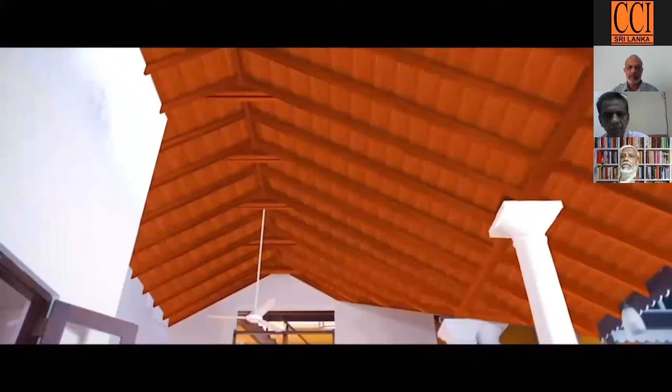Ceiling. Color up. Strip ceiling. Show your true colors to the whole world.

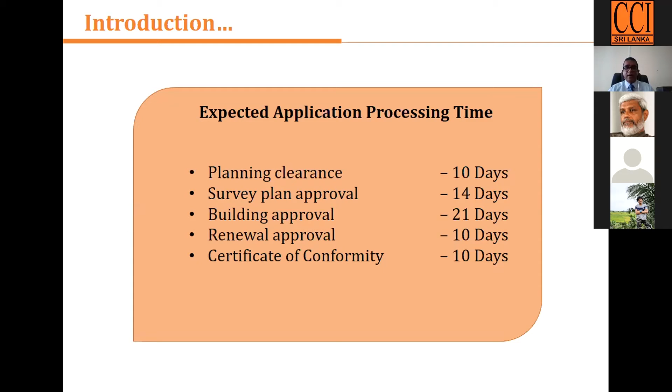These 4 topics I explained as introduction. And another thing I want to say, as a pilot project within this year, starting from September to December, we try to run this one-stop unit only within the Colombo Metro region area. It has 8 local authorities, including Colombo Metro area and capital area. Within next year, we hope to expand this program into all UDA offices in Sri Lanka, we have 22 sub-offices, we will expand to all UDA. At last, in phase 3, we hope to establish this system all over the country.

There are 268 local authorities we have already declared. We will install all these in local authorities within 2023.

The powers and functions of this process: to receive the application, process it, evaluate it, obtain process fees and issue approvals is the main objective. Another one is to apply for approvals from line agencies on behalf of the applicant or developer.

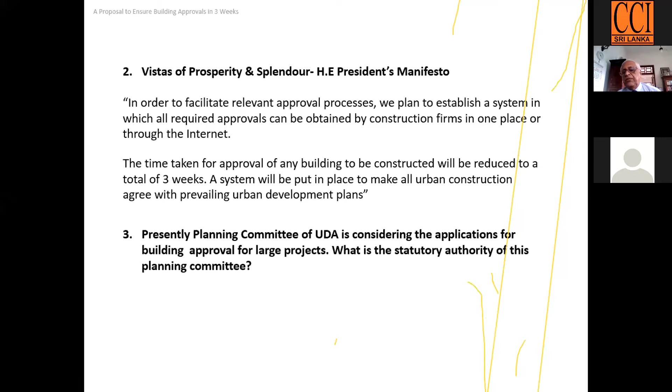So now, up to now, these building approvals, at least for the major buildings, have been considered and granted by the planning committee of UDA. It considers applications for building approval for larger projects. Now let us look at what is the statutory authority of the planning committee.

Now, if we have a look at the UDA provision under which this committee is established, I quote Section 8A of the UDA Amendment Act number 4 of 1982, on planning procedure: 'With a view to promoting and regulating the integrated planning and physical development of lands and buildings in a development area or part thereof, the authority shall, having regard to the amenities and services to be provided to the community, prepare a development plan for such development area or part thereof. Without prejudice to the generality of the powers conferred by subsection 1, a development plan may contain provisions in respect of all or any of the matters provided in the schedule to this law.'

Then Section 8B refers particularly to the appointment of the planning committee: 'For the purpose of advising the authority on all matters pertaining to the preparation, implementation, and enforcement of a development plan, there shall be appointed, in terms of section 5, a committee, hereinafter referred to as the planning committee.' Now, this is the planning committee that is functioning. Now, what is the statutory authority of this planning committee?

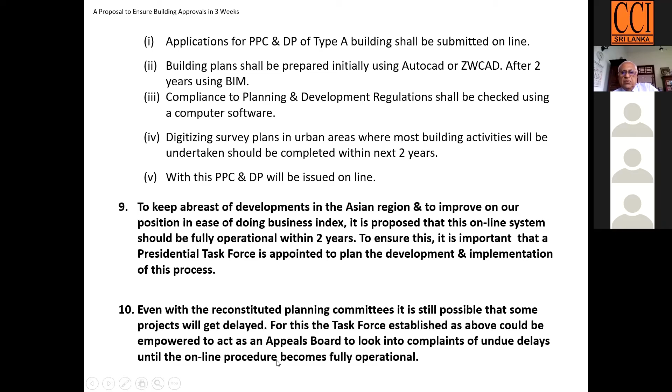For this, the task force established as above could be empowered to act as an appeals board, looking into complaints of undue delays until the online procedure becomes fully operational.

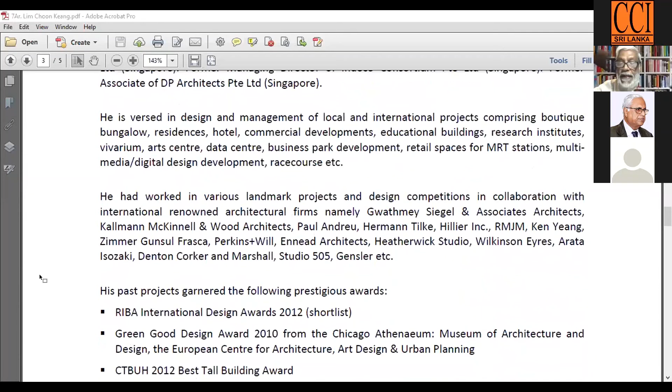He believes that architecture can change the world and make the world more happy. He is currently a council member of the Singapore Institute of Architects, SIA, and chairman advisor of the following SIA trusts: Practice Trust, Compliance and Standards Trust, Architecture Business, Small and Medium Architecture Practice, and Digital Architecture. He is currently the managing principal and creative director of CKLNet Architects.

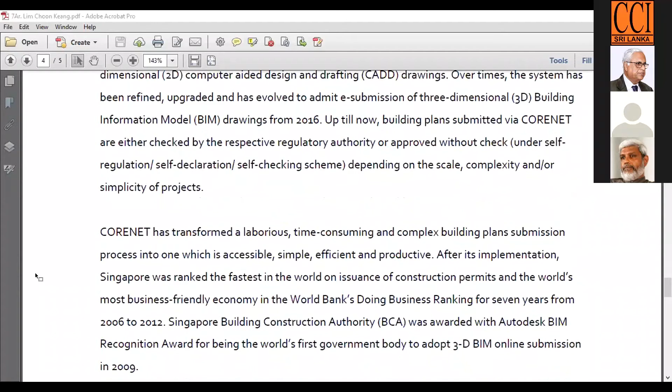Architect Lim has won many local and international awards, to name a few: Green Good Design Award 2010 from the Chicago Athenaeum, Museum of Architecture and Design, the European Centre for Architecture, CTBUH 2012 Best Tall Building Award, Gold Award 2011 by World Association of Chinese Architects. He is also a part-time faculty of the Singapore University of Technology and Design.

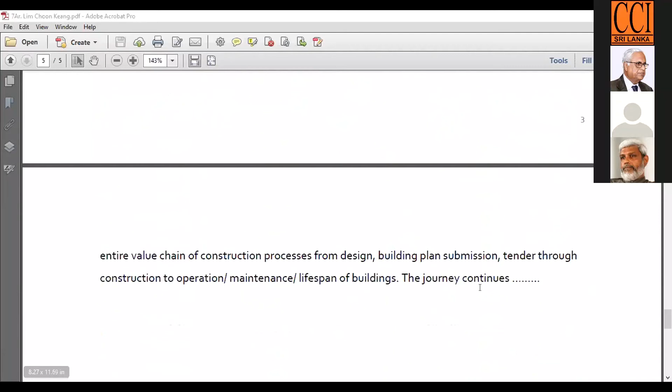Architect Lim is going to talk to us about the Singapore story of the online submissions and approval process since 2001. This is the G2B, government to business, internet-based system known as Construction and Real Estate Network, CORENET e-submission system. In 2016, the 2D submissions were converted to 3D submission via BIM. CORENET has transformed the laborious, time-consuming, and complex building plans submission process into one which is accessible, simple, efficient in procedure, and productive. Singapore's Building Construction Authority was awarded the Autodesk BIM Recognition Award for being the world's first government body to adopt 3D BIM online submissions in 2009. Singapore has not stopped. Now they are planning to launch the CORENET system, further redesigned, revamped, and launched in 2023, dubbed CORENET X. Among others, CORENET X will have features that enable automated checking of the 3D BIM drawings in very short time, and will reduce building plan processing approval time tremendously. From there, I'm going to leave it to the expert to elaborate on the success story of online submission in Singapore. I believe our officials will take it as a challenge to be ahead of Singapore in the near future. Thank you. Over to you, Architect Lim.

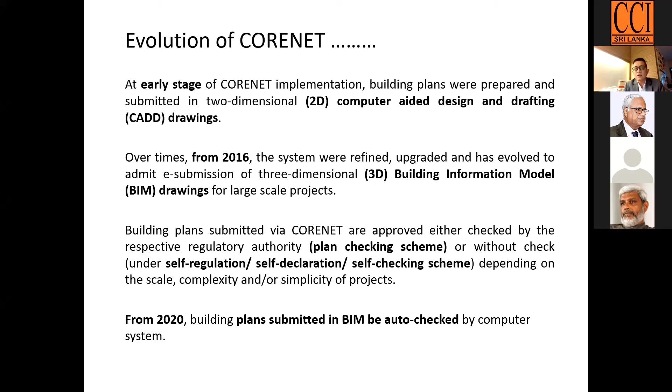So this is still at the very, very initial stage. Currently the computer is still not able to do 100% check, but by going through the automated checking system itself, it will help the processing officers filter a lot of the checks that they need to do by human effort.

So this is some of the authority departments, for example URA, our Urban Redevelopment Authority. They have implemented auto checking on the GFA, which is gross floor area. And PUB, the Public Utilities Board, has also implemented a so-called automated checking system. They even give an incentive if the plans are submitted using BIM and checked by the auto checking system—the plan will be approved, checked, or replied to earlier than if the plan was submitted without a BIM system.

So the auto checking system only does checking for three-dimensional drawings. It's not able to do checking on a two-dimensional drawing if you were to submit using AutoCAD or MicroStation. So yeah, we have come a long way.

So what is next, and what's the future direction? From CORENET 1.0, sometime end of this year or early next year, the government is going to do an upgrade to CORENET 1.0. They are going to do a launch of CORENET 2.0, whether by end of the year or early next year.

This is in keeping with the time and digital technology advancement. However, due to the rapid pace of changes in digital and construction technology, the CORENET system will be further redesigned, revamped, and launched in 2023, and is called CORENET X, like iPhone X. I think one of the major features of CORENET X will be automated tracking of submission processes and automated checking of 3D BIM drawings in a shorter time.

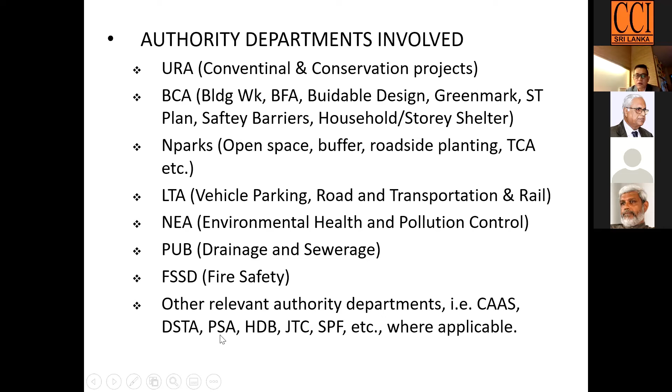There are a lot of other relevant authorities and departments, such as the Civil Aviation Authority that deals with building heights. We have Defense Science Technology if you are doing so-called projects that deal with military. And we have the Port of Singapore Authority if you are doing projects close to the coastline, and so on. So there are a lot of other authorities and departments that we need to deal with, and all this can be done through online submission.

For the submission itself, most of the projects involve registered architects and professional engineers. In Singapore, we call registered architects and professional engineers a 'qualified person.' If you look at the Singapore regulations and codes, they will always mention this term 'qualified person.' A qualified person refers to registered architects or professional engineers who are registered with the Board of Architects or the Professional Engineers Board, who are qualified to do a plan submission.

So these are the various submissions to the various authorities, which involve either registered architects or professional engineers. For professional engineers, we have structural engineers—civil and structural engineers—or mechanical and electrical engineers. For the various plan submissions to the various departments, there is a classification: certain types of submission are only to be submitted by registered architects, and some submissions are only confined to submission by professional engineers.

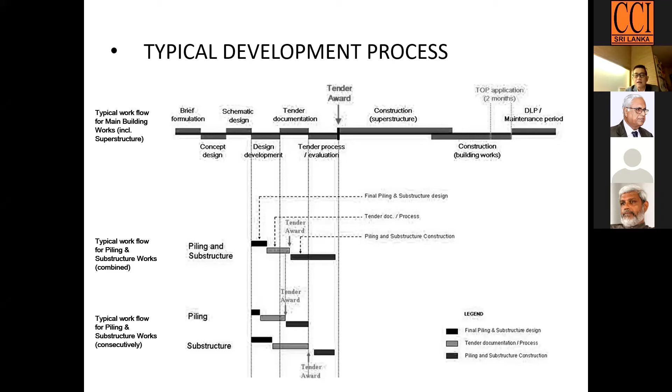Just to give you an idea of what the development process is, because with this, you understand how the two-step system comes into our submission system.

So the plan submission basically involves two steps. The first step is a DC plan submission, which is equivalent probably to a planning submission. It's a submission which actually focuses on the macro aspect of your project. For example, for URA, it's concerned with all the setback lines, your green buffer, physical buffer, building heights, maximum plot ratio, maximum gross floor area, and things like that.

For example, for the sewerage department at the DC stage, what you need is basically just to tell them where your connection point is, where your last inspection chamber within your boundary is that you are going to connect, and which public sewer manhole you are going to connect to. You do not need to submit a very detailed plan of your internal site, how you're going to run your sanitary system within your building and within your site. That will be at the next building plan stage.

So for the DC submission, basically it involves URA, the planning authority, and a few departments like Land Transport Authority, National Parks Board, Public Utilities Board, and National Environment Agency. At the DC stage, it doesn't involve Building and Construction Authority, which governs the building plan, and it doesn't involve our Fire Safety Department, which governs fire safety.

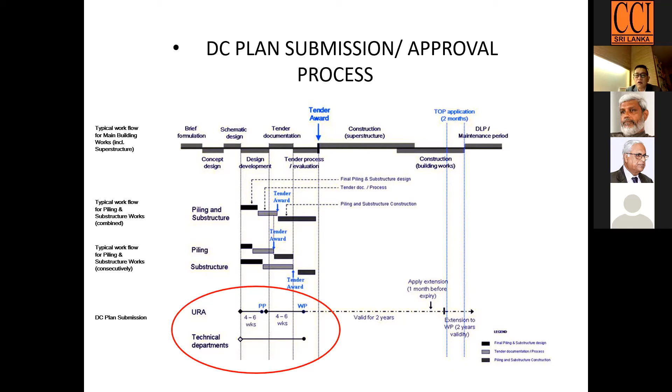In the meantime, the architect will also have sufficient time to reply to the planning authority and subsequently get the WP, called written permission, which is equivalent to a formal planning permission. Meanwhile, all the DC submissions for the technical departments can be carried out concurrently and independently. So the issue of written permission, or planning approval by our planning authority, does not depend on the DC clearance—what we call DC plan clearance from the technical departments.

When it comes to the building plan submission stage, it involves the Building and Construction Authority, which governs building plan approval, and the rest of the technical committees or departments involved in a detailed building plan submission. The condition for plan submission to the Building and Construction Authority is that we must first obtain formal planning approval from our planning authority, and then you can submit your plan to the Building and Construction Authority for building plan approval.

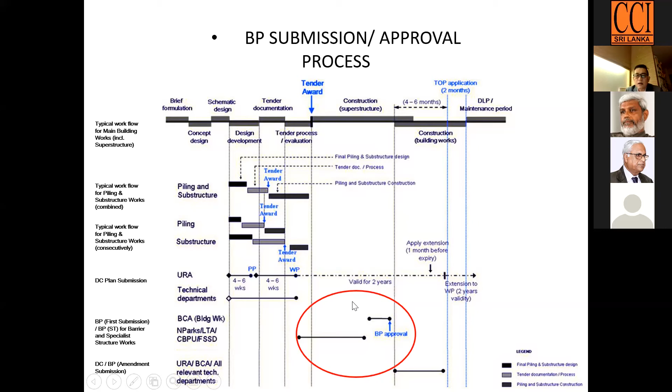Currently, the submission of plans to the Building and Construction Authority of Singapore for building plan approval is partially self-regulation and partially a plan checking system. But the submission and plan clearance are normally within 2 to 3 weeks.

When it comes to the end of the project, normally within 2 to 3 months before the end of construction of the building, we will start preparing for the temporary occupation permit.

For the temporary occupation permit, we have to get so-called TOP clearance from all the departments that we submitted plans for, for the DC and BP stages. Normally it's quite a lengthy process, and it happens within 2 to 3 months just before completion. Once we get all the clearances from all the technical departments, we apply for the final TOP with the Building and Construction Authority, which gives the final temporary occupation permit to the architect, engineer, or owner. Until then, once the TOP is issued, the owner can occupy the building.

After the TOP is obtained, the qualified person can proceed to apply for the certificate of statutory completion. Because when we apply for TOP, the focus is basically on the building safety aspect and the functionality aspect of the building—once the building is completed and good enough for the owner to move in and do a fit-out.

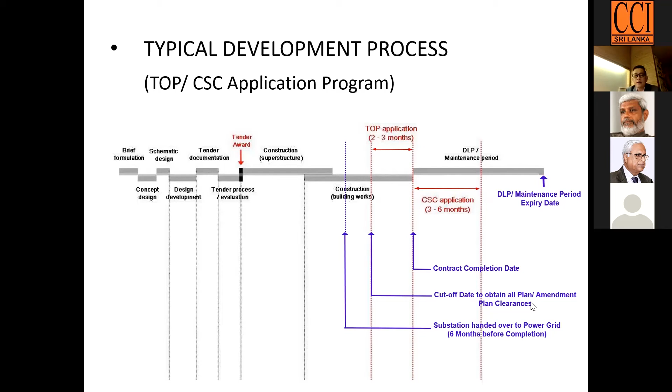During the CSC stage, there's a lot of other clearance, for example, clearance for work outside the boundary. For instance, when you have a main entrance from a public road into your development, it involves some work on the roadside, like planting, or building a public drain outside the boundary. These are considered non-critical for the TOP application. So the authority allows such non-critical works to be completed slightly after the TOP, so that the QP can apply for CSC after the TOP itself.

So for TOP CSC application, it's again a 2-track system. It depends on the complexity and scale of projects. If it's a complex project, normally it's a 2-step, 2-track system.

We will get clearance from certain departments for certain critical works. Once we get clearance, we submit to BCA, and BCA will check through the document. They will also conduct an inspection of the building itself, and if everything is in order, then they will issue a temporary occupation permit.

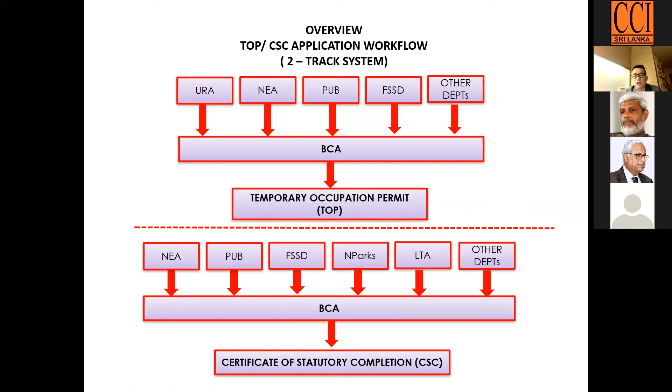The second step after TOP involves more, basically all the departments on all the work, internal and external. Once you get all the clearances, you submit to BCA. If cleared by BCA, then they'll issue a certificate of statutory completion, which marks the completion and conclusion of the architects' or engineers' statutory duty for the project.

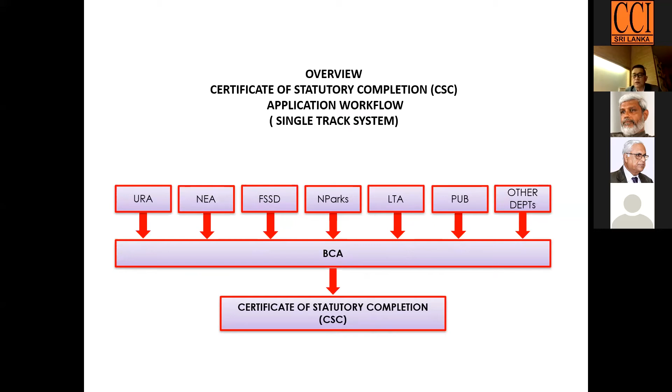So if it's a simple, small project, the architects can choose to do a one-track system. That means you just plan, get all the clearances from all the departments in one go, and then submit to BCA. Once everything is in order, BCA will issue a certificate of statutory completion. So these are basically the processes and procedures for plan submission for TOP application.

Next, we are going into the CORENET submission process and workflow. Under CORENET, basically all the plan submission and all the application is done online. You can do it anywhere, 24/7, anytime, from the comfort of wherever you are.

So in order to start using the CORENET system, these are the prerequisites. In terms of hardware, basically you need to use a computer or laptop with sufficient RAM and hard disk space. You need to have internet access. On top of that, we have this NetTrust USB token for digital signing.

It's basically a small gadget, like a USB. When we need to submit our plans, we need to digitally sign, and we call it encryption. We have to encrypt the drawing, which is equivalent to digitally signing the drawing when we submit it.

In terms of software, basically you just need to have a common office computer application and OS software, and you need to have a common internet browser like Chrome, Microsoft Edge, or Safari. For submission, you have to download an app called ES Pro, which stands for Electronic Submission for Professionals, or in short, ES Pro apps.

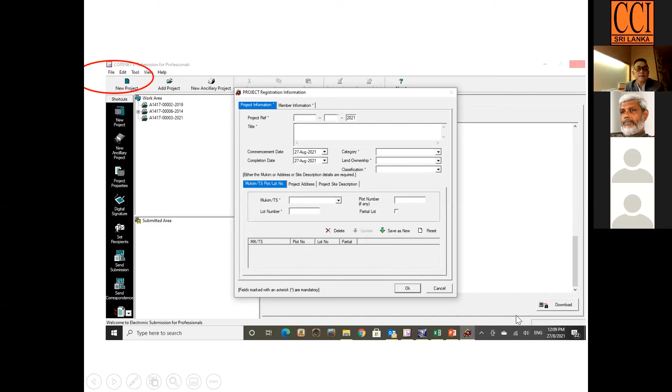And next is to register the project. Once you register a project, this information comes out. For example, you can see the reference number is A1417003, which is the third project I registered in year 2021, and this is the title for a proposed addition and alteration to a plant nursery.

And then this is a category, you have to, what's the classification? And then next is to register.

Members. So these are all the members. Normally we require to register the architects, all the professional engineers involved, the owners and the contractors, and some other specialists.

Professionals that is required to be registered. So basically for architects who started to register a project, he will be a so-called main coordinator. And the coordinator, so only the coordinator can do changes to the information on the project and the members' information.

Okay, so every time when you register the projects or register a member, an email will be auto-generated and sent to the architects and the people concerned. For example, after I registered the project reference number and project title, once I registered, immediately an email will be sent to me within a few minutes to inform me that a new project has been registered. This is the number and this is the title, and this is the number and title that we use for all the application that is related to this particular project until we obtain a CSC.